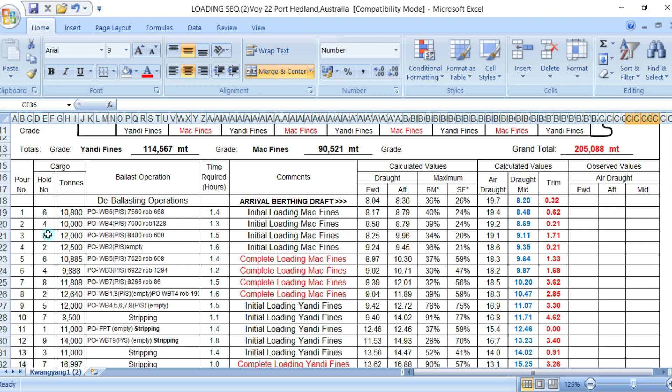We have only one loader for loading, and the sequence or the pour is here, from pour 1 to 20. The loading sequence starts from hold number 6, hold number 4, 8, 2, until holds 1 and 9 for trimming.

So at pour number 18, the vessel will stop loading because we are going to compute how much cargo to load for trimming. In this case, the plan has made it so that in hold number 9, 2,500 metric tons will be loaded, and number 1 will also be 2,500 metric tons, with a total of 5,000 metric tons of trimming cargo for the holds.

Let's assume the sailing draft is the midship draft, or the final draft for sailing, is 18.23. So by departure we should have an even keel, no list, at least no trim. It should be even keel, and the final draft should be 18.23.

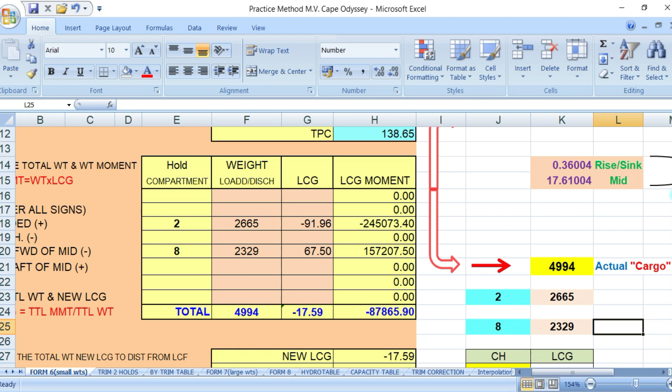It says here how to find trim when handling several moderate weights. You have to put here your forward draft and aft draft. Let's say, for example, you as chief mate and the draft surveyor agreed that your forward draft will be 17.77. So this is draft forward, and your draft forward is 17.77. You put that in your loading program.

And the aft draft — put your aft draft here, go down — the aft draft will be 17.96.

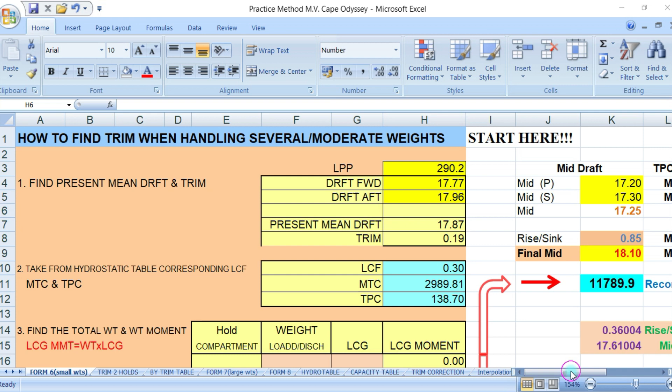Let's assume there's no list, so your forward draft will be 17.77 and your aft draft is 17.96. Of course, you also have to take your midship draft, port and starboard.

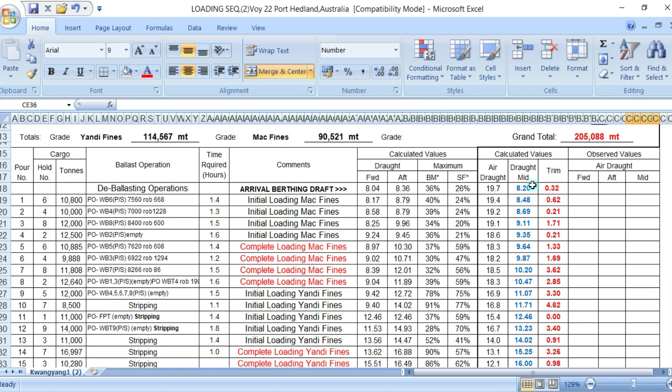And what will be your midship draft, port and starboard? The midship draft here is 17.87 — that will be your port reading. And starboard will be 17.87.

And your trim is 0.19. So look here, guys, the trim according to your computation in the program is 0.19, or 19 centimeters. Now look at your plan — your plan says your trim should be 19 centimeters. So we have the same. According to your plan, you have a trim of 19 centimeters, okay?

Now, your plan says your departure draft, your mid-draft at departure, should be 18 meters 23 centimeters. So the final mid-draft, or final departure draft, should be 18.23.

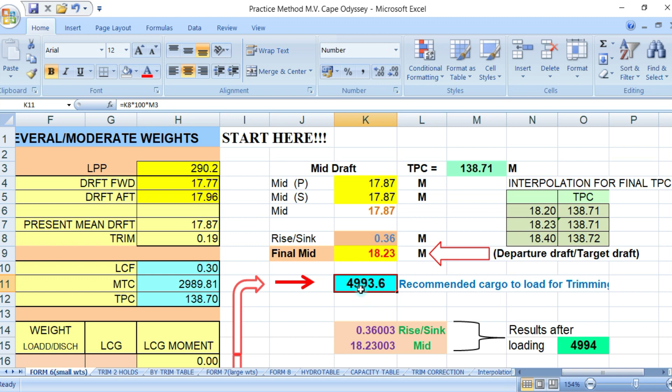4993.6. Okay, so this is the recommended cargo to load for trimming is 4993.6.

Now just follow this arrow here. Since this is a decimal, we just round it up with 4,994. Okay, what is 4,994?

So what happens if you load 4,994? Results after loading 4,994, your mid-draft will be 18.23, which is almost the same here, and your sinkage is 0.36, which is the same here.

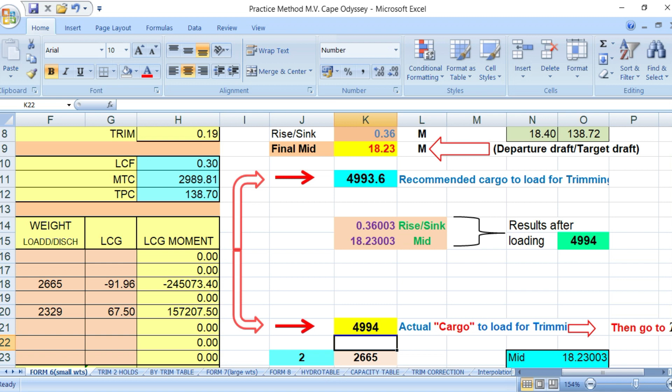Okay, so the next procedure would be this will be the actual cargo to load for trimming. Then you go to Trim 2 Holds, this is the one, go up. And what is this program? Trimming with 2 holds. Okay, trimming with 2 holds.

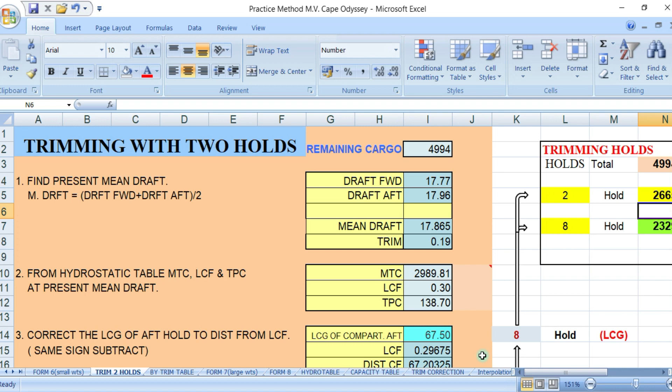You have here the remaining cargo to load for trimming is 4994, and your cargo for trimming is 4994, and your trimming hold is 1 and 9. Trimming hold should be 9 and 1.

Okay, so what is the 1 and 9? So you have now your trimming hold 1 and 9, and you go down. What will be your final trim?

The final trim, according to the plan, the trim should be 0. The trim will go down. The trim should be 0 or nil, because you have an even keel, no list. You have the same draft of 18.23 forward, 18.23 aft, and your midship will be 18.23, so you have 0 trim.

So in your program, you put here final trim should be 0.

Now, how much would you load in number 1 and number 9? According to the program, in hold number 1, you should load 2,477. Number 9 hold will be 2516.

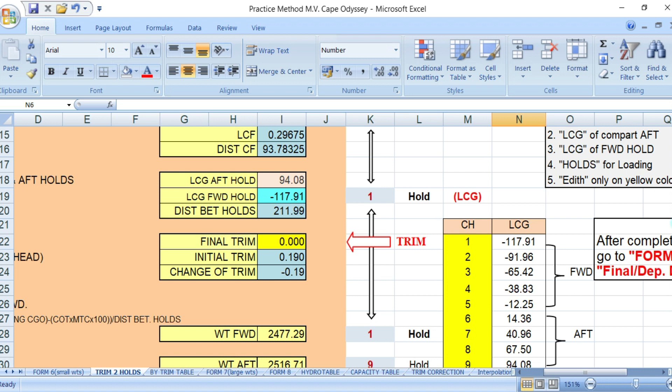So I put here 2477 in hold number 1. 2477. And number 9 should be 2517. And your trim is 0.

And what will be your final draft after loading hold 1 and 9? So final draft forward will be 18.23, aft draft will be 18.23, you have 0 trim, and your mean draft will be 18.23, which is this one, and your mid draft, which is this one, is 18.23003. This one. And so you will have a deflection of 0.

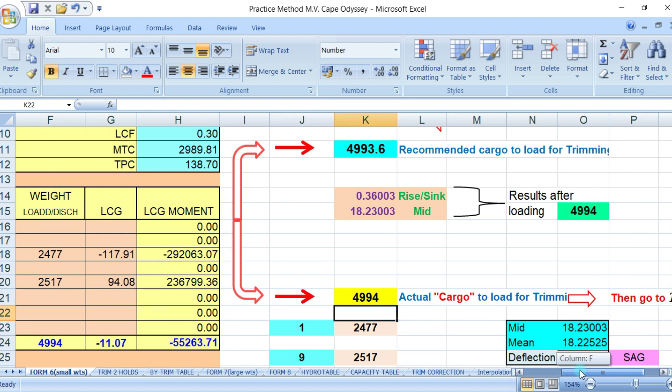So we go on the other side. Okay, so once you loaded for 4994, number 1 should recommend to load 2477, which you have here, and number 9 is 2517, total of 4994, which is the same here.

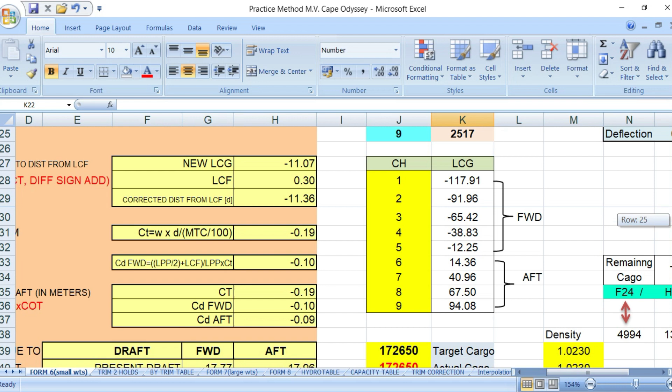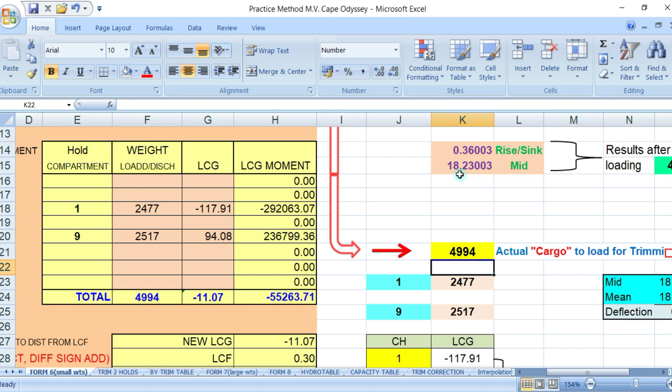Okay, and what will be your final draft here? The final draft would be 18.23 forward, and aft will be 18.23. You have 0 trim, and your mean would be 18.22525, which is this one, and your mid draft is 18.23, which is this one, 18.23003, and your deflection is 0.

Okay, so you get your target sailing draft of 18.23, forward 18.23, and aft draft of 18.23.

Now let's take another sample of this sequence, let's say your trimming hold is 2 and 8. Go to this hold number 2.

Okay. So there's no... so we take, for example, another loading sequence. Okay, when we take this example, Port Hedland. Okay. So we take this another example of the loading sequence. Now you're still loading in Port Hedland, and this time it's South Korea. This time your final... oh, it's the same, huh? Let's take the other one. Sorry.

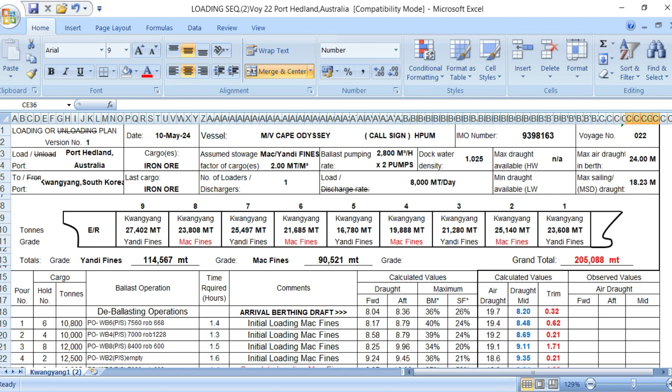Take this one. Take this one out to be sure. This one, okay? This one.

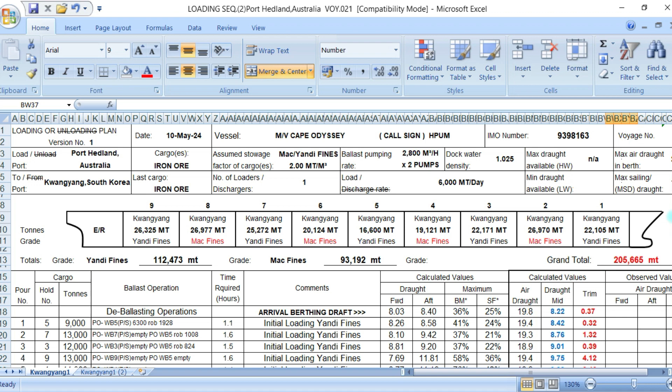This time, we are loading in Port Hedland, discharge in Kwangyang, South Korea. The total cargo will be 205,665 metric tons, okay? And the trimming hold will be 8 and 2, okay?

So upon reaching port number 18, your final forward draft will be 17.67. So we put 17.67, 17.67, 17.67... 17.67, am I right? 17.67, and your aft draft will be 18.07, okay? Aft draft will be 18.07.

So you have a mean draft of 17.87. What will be your port, mid, and starboard mid drop? According to your mid drop, it will be 17.87 for port, and starboard will be 17.87. So that will be your mid drop.

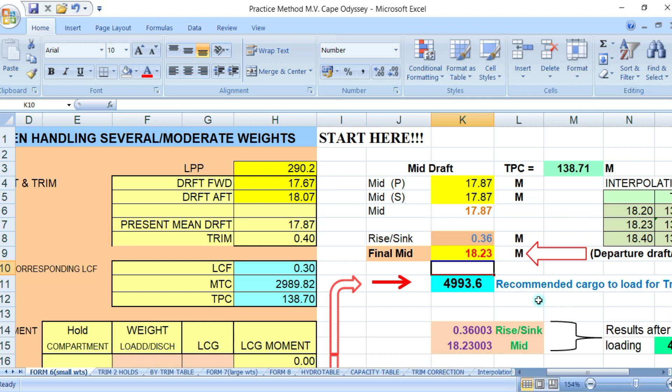Now, then you still have your sinkage here. So your final mid of 18.23 minus your mid draft of 17.87, so your sinkage would be 36 centimeters, okay? So with this sinkage of 36 times 100 times TPC, you will have the value of 4994, okay?

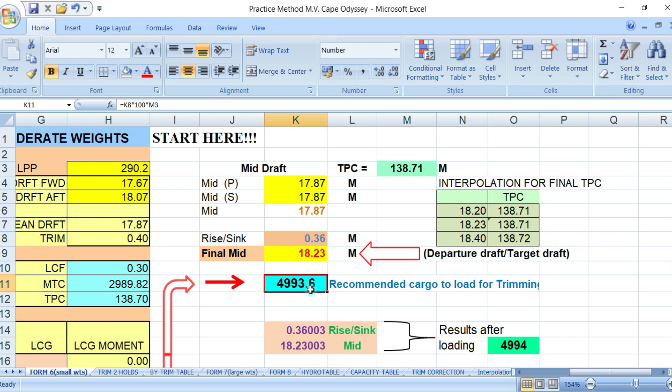Again, K8, this is your sinkage times 100 times M3 times TPC, M3 will be your TPC. The value will be 4993.6, okay? So from here, you round it up to 4994. What happens if you load 4994? Your mid drop will be 18.23, almost the same, and your sinkage is 0.36003, which is almost the same.

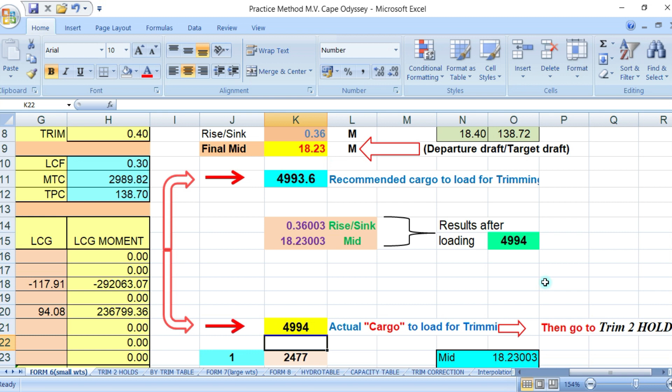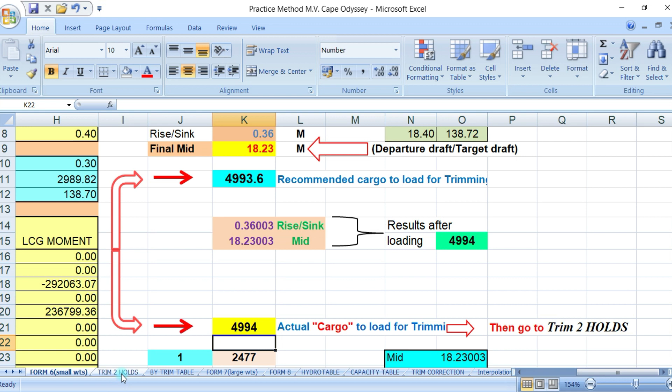Then according to the program, after loading 4994, you go to Trim 2 Holds, go up. You have here remaining cargo 4994 and 4994. Now the trimming holds this time are hold number 2 and hold number 8. Check. The trimming holds will be 8 and 2, and 2,500 metric tons each for 8 and 2.

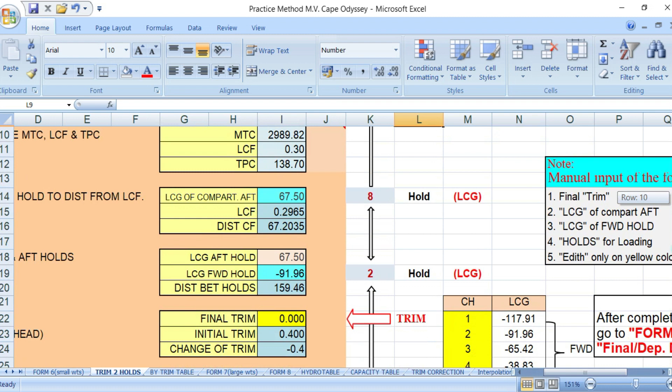And your trim would be 20 centimeters. So you put here 2 and 8, and your trim should be 20 centimeters. Put here 20, so 20 centimeters.

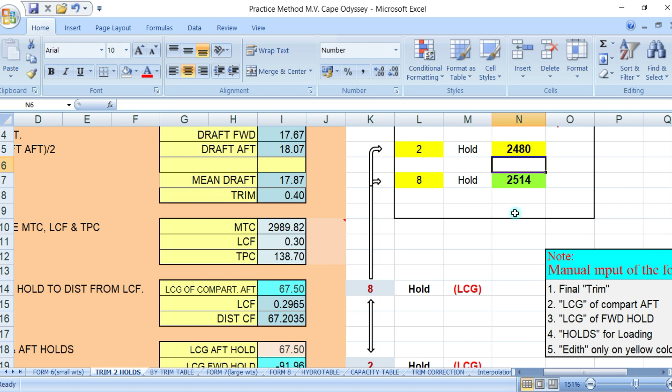How much would you load in number 2 and 8? According to the program, in number 2, you will load 2,480. So in hold number 2, 2480, and number 8 should be 2514. 2514. Okay, and how much would be your drop?

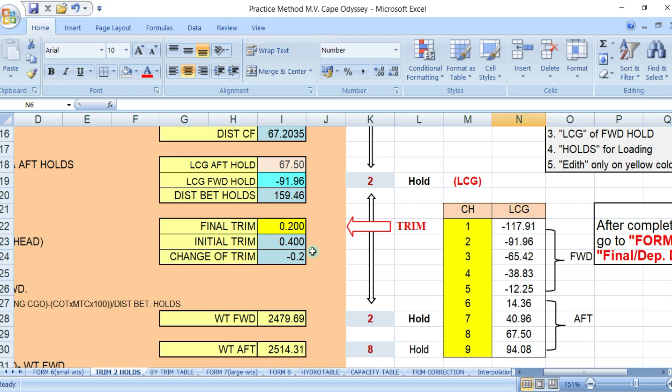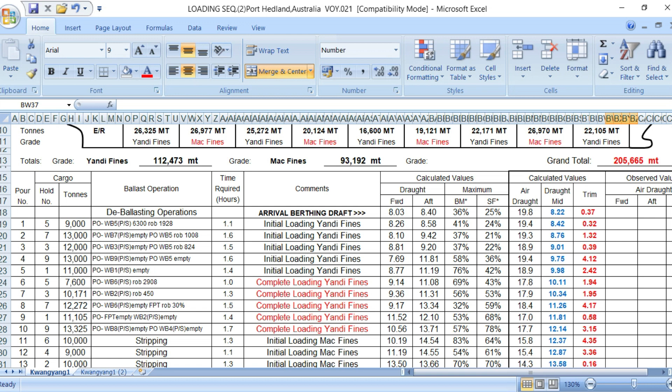And your trim should be 20 centimeters. And how much would your draft be? Forward draft will be 1813, and aft draft will be 1833. Your trim is 20, your mean is 1823. So forward says 1813. So your final draft forward is 1813, and aft draft is 1833, which is this one. And your trim is 20 centimeters.

The other side: hold number 2 will be 2480, and hold number 8 will be 2514, total of 4994, which is the same. And your final draft, forward will be 1813, and your aft draft will be 1833. Your trim should be 20 centimeters.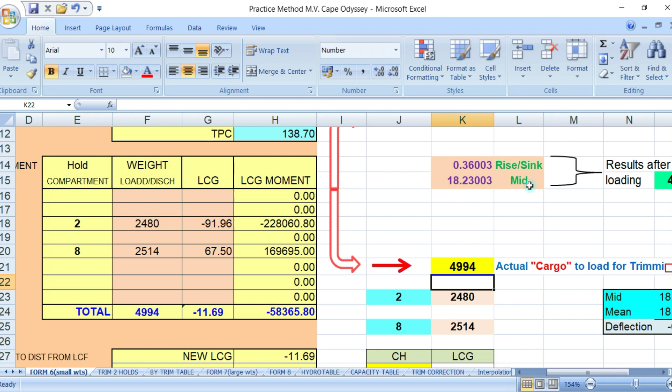And your mean draft will be 18.23026, which is this one, and your mid is 18.23003, which is this one, your mid. And your deflection would be zero. So that's it, guys.

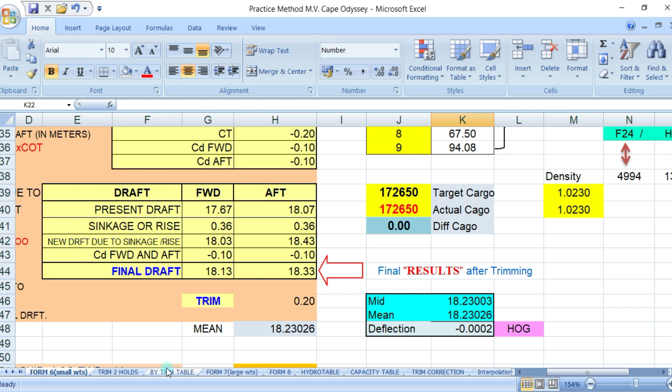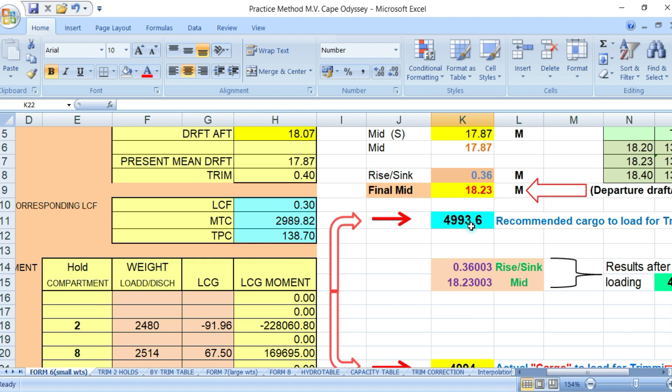Now I would explain further that if you follow this recommended cargo to load for trimming, you will never be short of cargo or overload of cargo. But according to the plan, look here, this is 4994. But according to the loading plan, you have to load 5,000.

So let's say we put 5,000 here. Take note of this midship draft. So with 5,000, mid draft would be 18.23046, which is almost the same here, and your sinkage is 0.36046. Okay, so we go to the trimming holds.

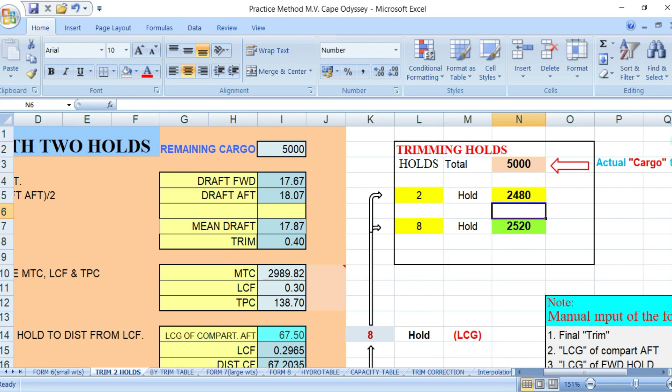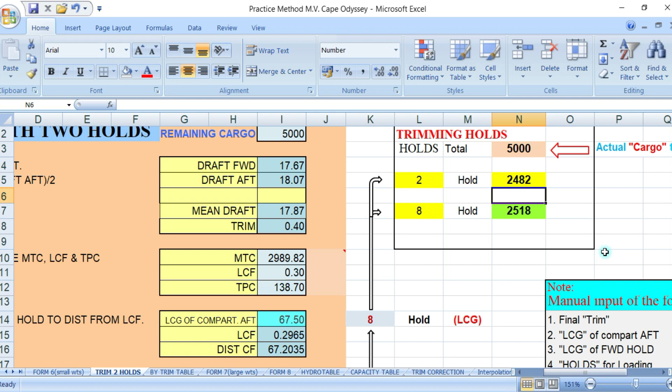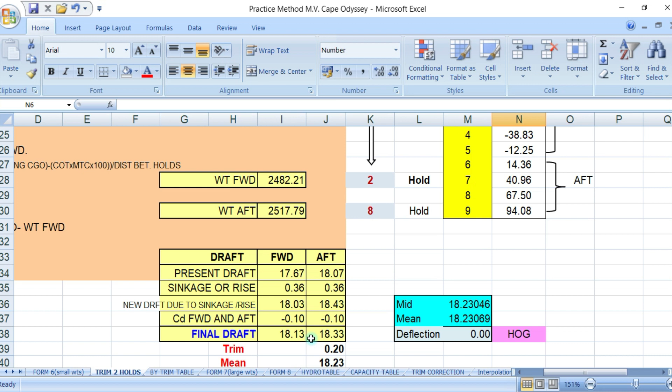And here you have 5,000, 5,000. How much is recommended to load? You have 20 centimeters here, and it says recommended to load forward will be 2482, and 2518 in hold number 8, and the final draft would be the same. Forward is 1813, aft is 1833, trim is 20, and 1823 mean, so you still have no deflection here.

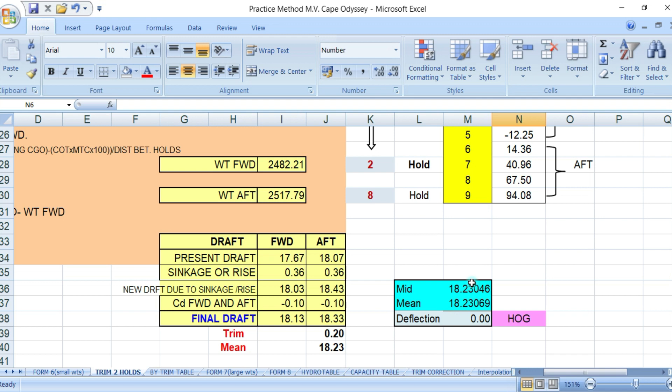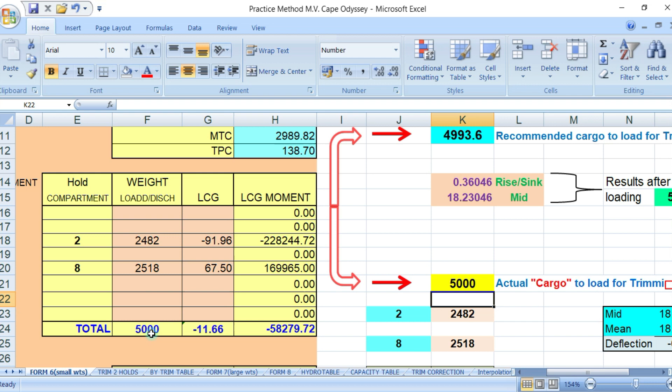Let's say on the other side: hold 2 you have 2482, which is this one, hold 8 is 2518, which is this one, total of 5,000. And your final draft is 1813 forward, aft is 1833 of 20 centimeter trim, and your mean is 18.23069. And so you have a zero deflection.

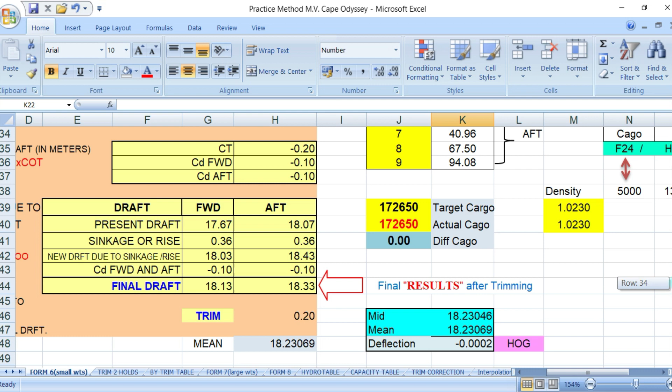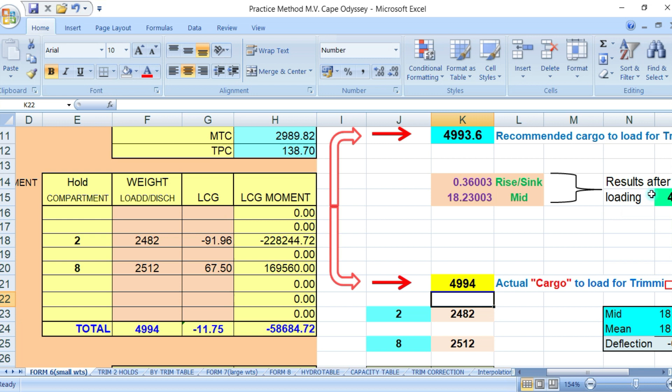But look guys, if you load 5,000, you have more of 00.46, and this one 00.46. But if you follow this recommended cargo total of 4994, the midship drop is almost the same, 23, and the sinkage is the same. So I would recommend whatever the program recommends as the amount of cargo to load, you just follow this one. You will never exceed your amount of cargo to load, you will never get less, so you will never get overload or short of cargo.

Just follow what the program has recommended for loading.